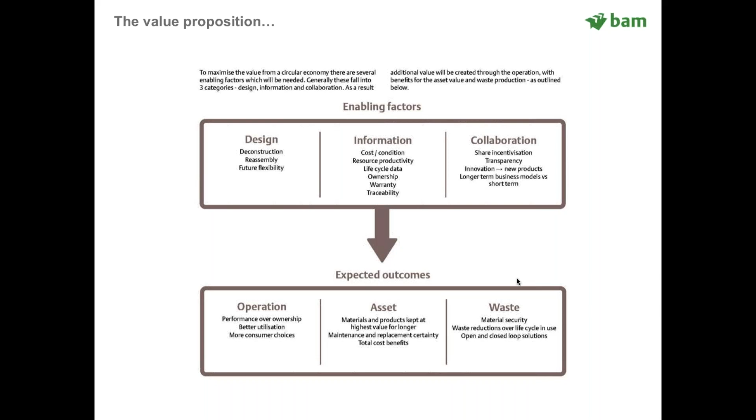So I'll give you a few examples. Obviously I'm going to stick to the 10 minutes, be very brief, but feel free to ask questions afterwards.

So the ABN AMRO Pavilion, Circl in Amsterdam, when it came to BAM as a tender, it was not a circular economy approach, and the architect had designed this wonderful concrete structure. It was almost the opposite of sustainable, but it was very stylized. It would have been a landmark building.

I think what we've done, through roundtable discussions with the client, the architects, the engineers, and also bringing on board the supply chain, is innovate around different solutions, looking at modular prefabrication and really designing for disassembly. But not just stopping at design for disassembly, thinking about reuse of materials through that process. Collectively, we managed to come up with a totally different solution, a different way of engaging with not just the internal and external stakeholders, but also the client.

ABN AMRO found that for them, going through this process with us of engaging with their own employees was valuable. One of the products in the building is made from jeans, used jeans from the staff, the employees, my colleagues as well, people working on the project, and that became acoustic insulation, which is visible to everyone.

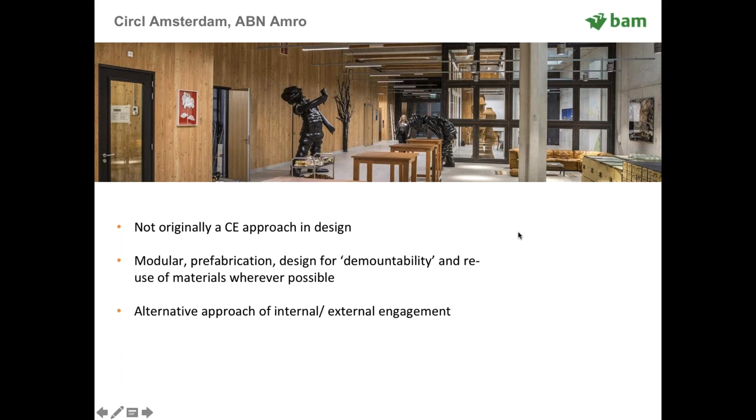So the next slide is basically looking at how we focused on life cycle thinking. For example, in a normal process when you're designing, you look at the inherent risks around building regulations, air tightness, water tightness, fireproofing, etc., performance. But what we did here was put together a matrix looking at all of this, but also circularity as a key emphasis.

And where the client really valued that input is where we could demonstrate that by going for material X instead of Y. So if we're going for timber instead of steel or concrete, for example, as the structure, we were able to increase the residual value of those assets.

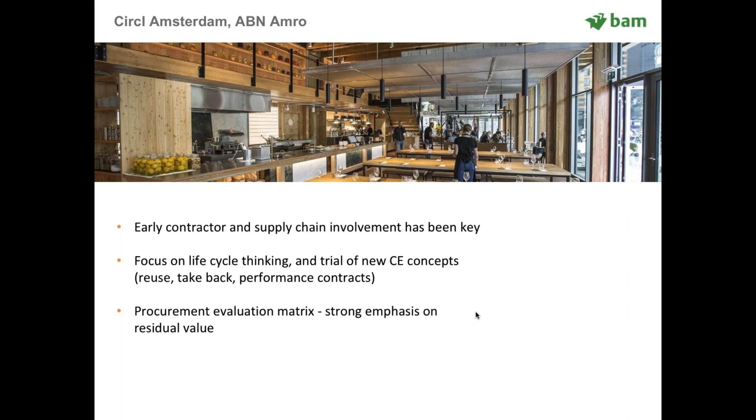So again, just moving to the next slide. This sort of highlights some of the case study in effect. What was the business model? So you can see that on average we've achieved residual values of greater than 50% compared with the initial budget cost, and that's after 25 years.

And also what we're very keen on exploiting is understanding what different members of the value chain needed to do within their role against the standard linear model. So what does a designer need to do to become more circular? We've been through that. Obviously you'll get the slide, so I won't go through everything in detail. So if we just move to the next slide.

Another project that we worked on, again finished last year, is the Royal HaskoningDHV office. And this was interesting because it wasn't a new build, it's a refurbishment project where they, as a tenant, wanted to occupy the space for 10 years.

And we, as the developer, the contractor, the designer, had to really think around, okay, how do we create a site that gives the occupant, the tenant, the space that they need, and it really got us thinking about where do we get the best quality materials that can be reused in the first instance, but also after 10 years, if the building gets demolished or they decide not to renew the lease, how can we ensure that the residual value of those materials will be over a certain percentage, and that would guarantee our income essentially.

So we really took the risk on residual value for this project, where in order to get the investor signed up to give us the cash to develop this project for a paying tenant, we had to seek investment. Now the problem being that from the time that we had a design which was signed off to getting the investment, there was probably 3 or 4 months gap.

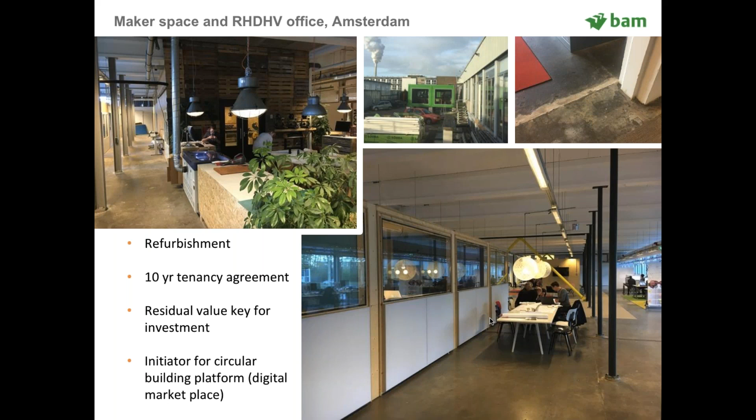And what would really help that is to initiate a circular building platform, and that is a digital marketplace. So that really worked in our favor, and that sort of then led to a product being developed, which is a circular building platform, which we're developing with IBM.

Another project which I just wanted to highlight is, again, an experiment we did in London. It was really to try and engage with our supply chain to understand the consequences of giving us materials that we can then reuse or that can be fit for purpose for reuse. This was an experiment, and it really challenged the suppliers to think, well, what do I do with those materials when they return back to the manufacturing plant? So again, that was an interesting proposition.

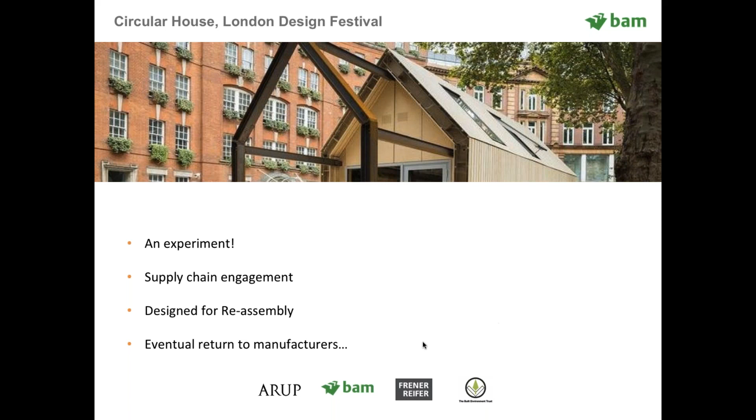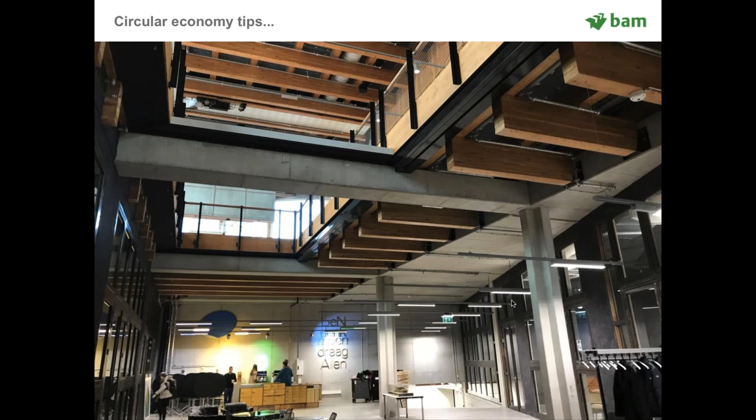If you just click again... sorry, you've gone the wrong way. So if you go to the end again, yes.

Promotion of lifecycle solutions has really helped us offer our clients the value proposition they need, to understand that the asset value of their building or infrastructure project will be worth more in a circular fashion than a linear fashion. But also to understand different design approaches.

It's been key that getting early subcontractor and supplier involvement really produces the value we're looking for, and it's a collective vision that we've been working together to propose circular solutions together. So that concludes my presentation.

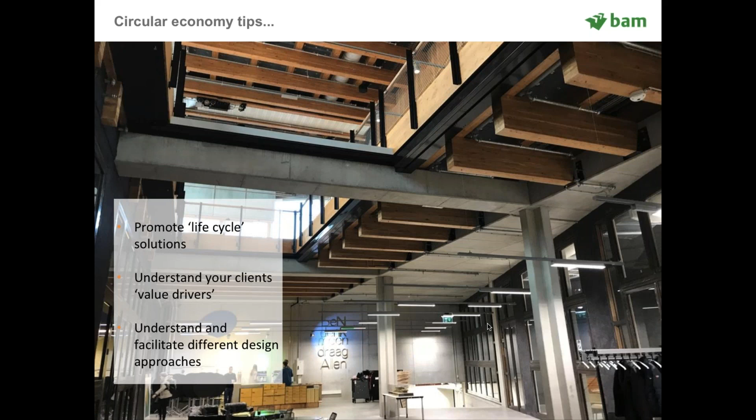I like very much in the presentation this focus on value creation, and it was also justifying that these business models can be profitable even in the construction sector, which is seen sometimes as a bit conservative.

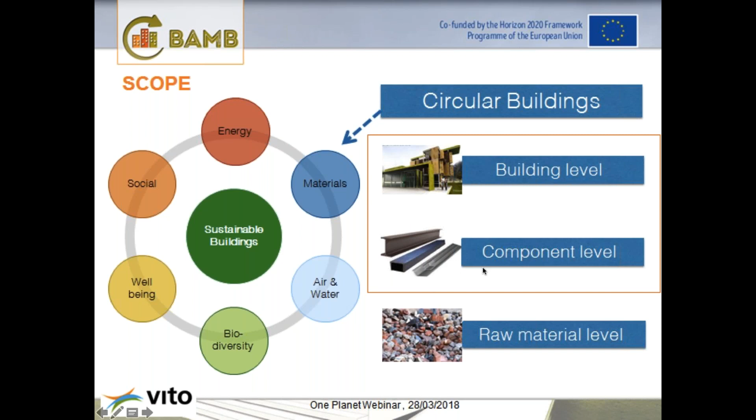Next slide, please. One of the challenges which is particularly relevant for the building sector is how to create short-term incentives. Buildings have very long life cycles. They also often change ownership several times throughout their life cycle. This means the people who pay to build the building are not often the same people who will handle it when it reaches end of life.

We all know that building circularity should start from the design phase. But how can we convince people to invest today in circularity for some residual value in the distant future, which will probably be received by someone else? And how can we convince people to invest today in circularity when there's no taxation benefits yet, like those available for building energy improvements? Next slide.

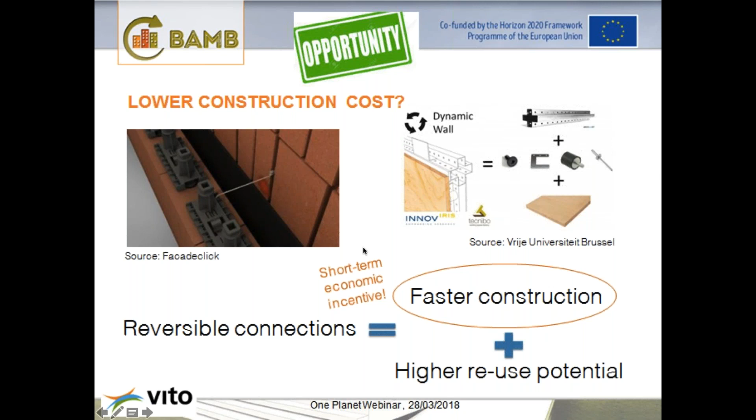There are actually still opportunities. To facilitate building circularity, reversible connections are very important. So instead of using traditional wet adhesive materials, such as mortar, these reversible connections often use dry mechanical components, like these bricks and interior walls. As a result, the construction can be a lot faster. They can be less weather dependent, and they can be less skill dependent. Especially in countries where labor costs are a lot higher than material costs, these reversible connections can provide short-term economic incentives while also providing longer-term circularity potentials.

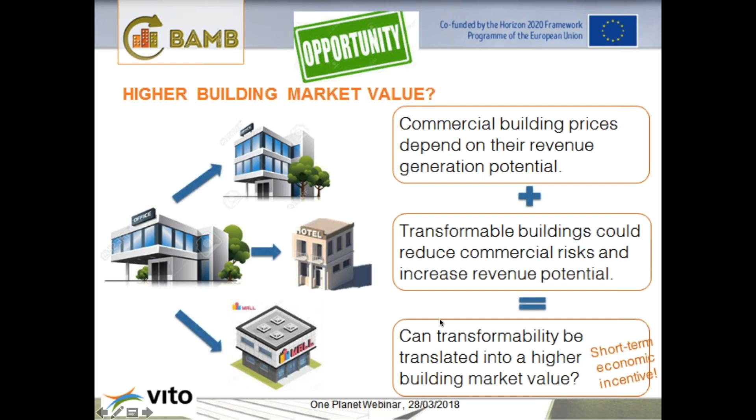The key question is, can this be translated into building market price today? And if yes, then we have created a powerful short-term economic incentive.

A second challenge, which I will discuss today, concerns circularity at the component level. The reuse value chain of building components is often informal and underdeveloped, like Nitesh has just pointed out. It is actually a generic challenge which applies to many sectors. There are many barriers to reuse.

There are technical barriers. People don't buy used smartphones because the technologies are outdated. There are also cultural barriers, like, well, I don't want other people's junk in my house. There are legislative barriers, but probably the most surprising barrier is cost.

After all, except for antiques, shouldn't used stuff be a lot cheaper than new stuff? Otherwise, why would anybody buy them? But as we will see on the next slide, this is unfortunately not always the case today.

Let's take structural steel elements as an example. Technically speaking, steel does not degrade. Decades later, steel beams can still keep the same performance as when they were new. But today, most used steel beams become scrap metal instead of being reused.

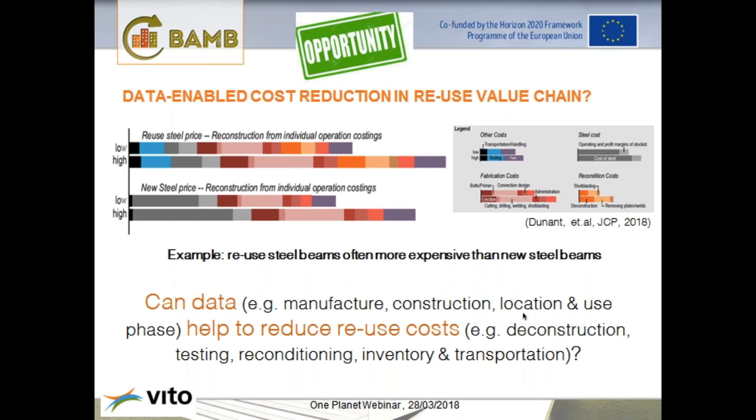Let me wrap up. If we want to scale up circular building to a level which will really make a positive difference environmentally, it needs to become an economically logical choice. It is a business challenge, but the answer is not provided by business alone. We need the creativity of architects, engineers, product designers, and technicians for more cost-effective technical solutions. We need the power of large players, such as Royal BAM, to pull the supply chain and reach economy of scale. We need policy instruments which can effectively stimulate good practices.

We also need an eye for business opportunities under today's boundary conditions. We need the technology, policy, and business innovation engines to work together so that one day, when talking about circular buildings, instead of asking why, people will say, why not? Okay, thank you for your attention.

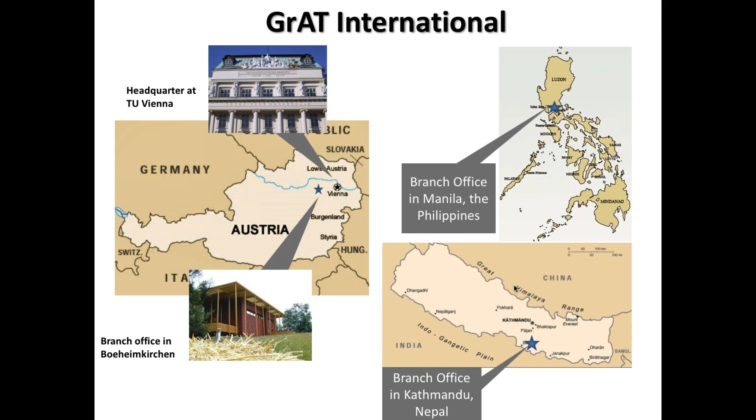So we are not only based in Austria, where our headquarters is, but we do have international offices. One is right in Manila, where we do the Zero Carbon Resorts project, tackling Philippines and also Thailand. And we do have another office in Kathmandu, Nepal, where we basically serve the South Asian countries. The Zero Carbon Resorts project itself is a 4-year initiative, which will actually end this year, and it's supported by the European Union with the Switch Asia program and the Austrian Development Cooperation.

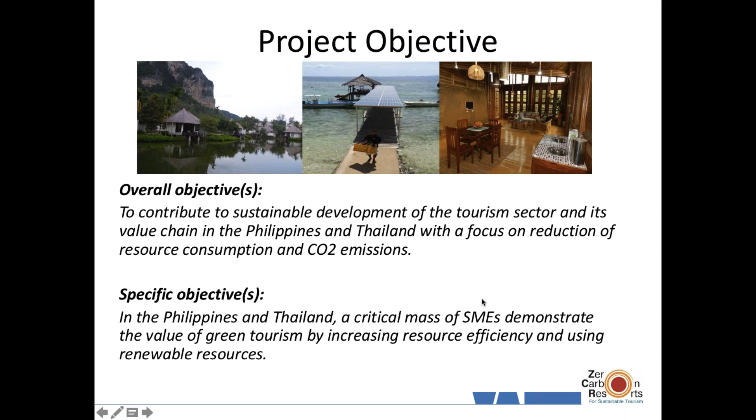Our project objective is to contribute to sustainable development of the tourism sector at large, with the aim to create a critical mass of SME companies demonstrating the value of green tourism by increasing resource efficiency and using renewable resources, at the same time increasing profit and creating value for the communities, and serve as a driver.

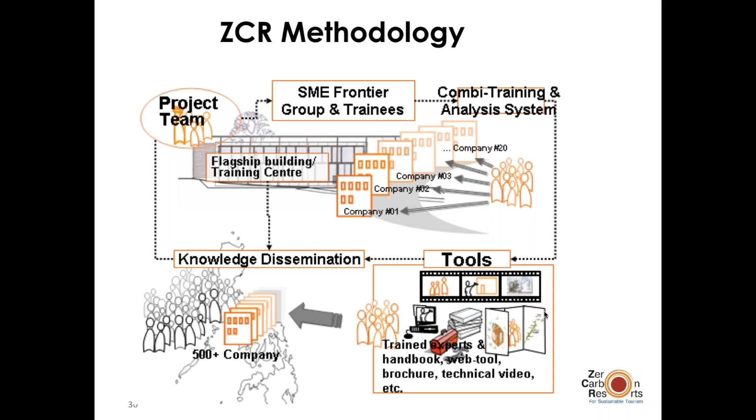The methodology looks a bit complex, and yes, it is. We've started off with a very small group of frontier companies, maybe like 20 companies. We've combined that with a training system. We trained about 200 local engineers and architects in order to help spread the news and spread the concept via tailored tools like handbooks, brochures, and website materials that all serve as outreach material.

The 3R methodology raised in the title is really meant to be a triple bottom line approach. The 'reduce' is harvesting the low-hanging fruits with very limited investment costs, and I'll show you a few examples right now.

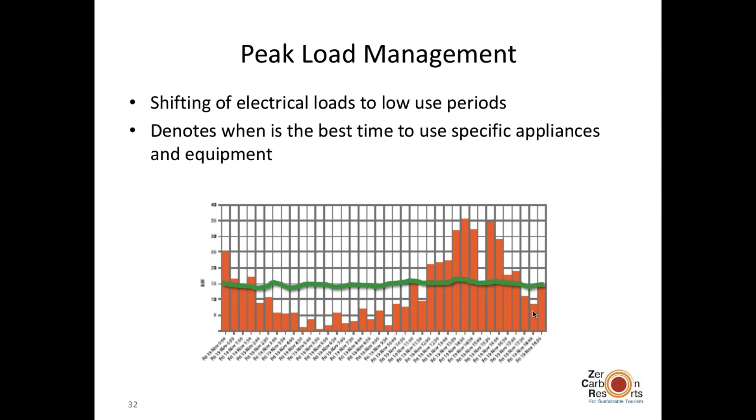For instance, we talk about behavior change. That's nothing where you need to take money to your hand. Shifting electrical loads to low-cost usage periods will already generate savings, and those savings can be used later on, just like with the next few examples.

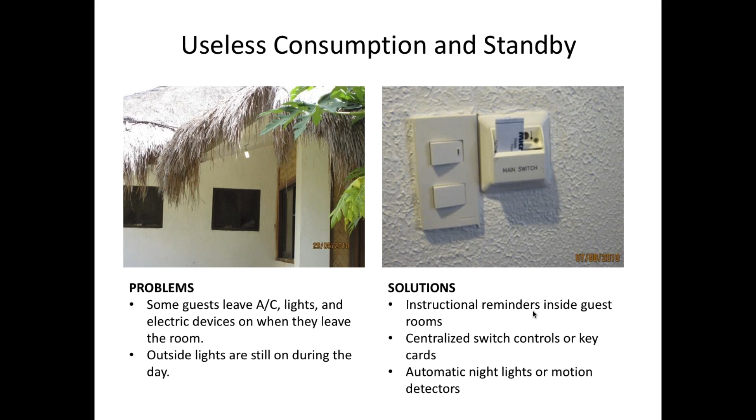Again, behavior change. Useless consumption and standby is rampant and very abundant. Lights are on during the day. Standby is on in all rooms. This is all energy cost that has no benefit, but it comes with a price tag.

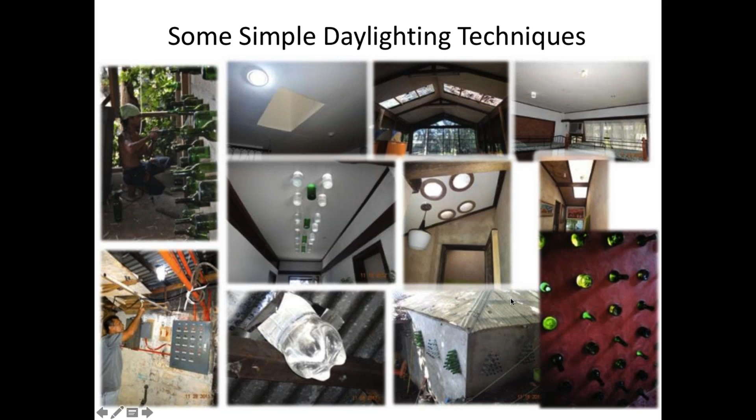Another example: daylight can be used in so many cases, and it's basically free of cost. We have developed a number of nice-looking but very cheap solutions, and our participating companies have been very creative in supporting that initiative. You can definitely see a number of nice examples here.

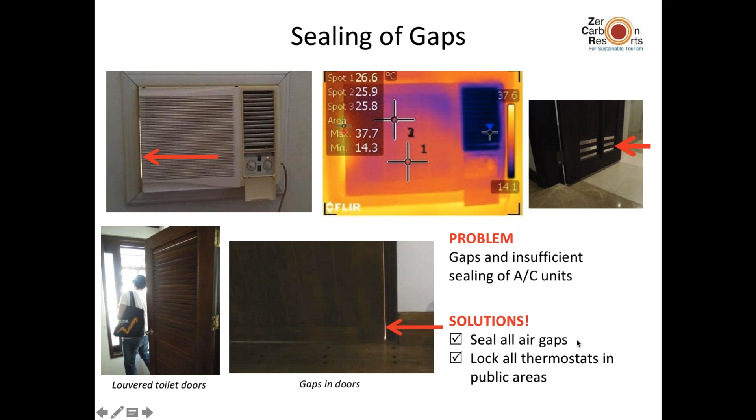Another issue is air conditioning. It is very often just very inefficient, and even without changing the equipment, you can drastically reduce the energy consumption by sealing the gaps, closing the doors, and not cooling the ambient rooms. That all boils down to a significant number of savings, which, at the end of the day, is money not spent on operational costs, just like changing the color of the roof.

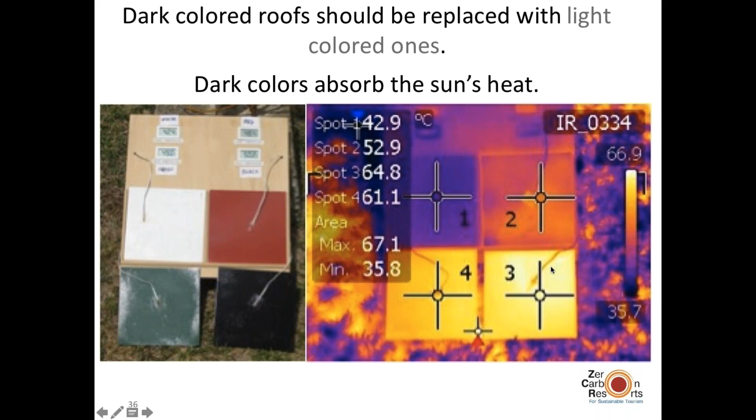So now all those savings that were generated in this reduce phase, we ask the companies to reinvest. So don't put it aside, don't regard it a profit, but reinvest that by switching to renewable energy, by switching to more energy efficient appliances. And we help them also choose the most efficient ones. And by doing so, they can actually generate more savings, which eventually will lead us to our ultimate goal.

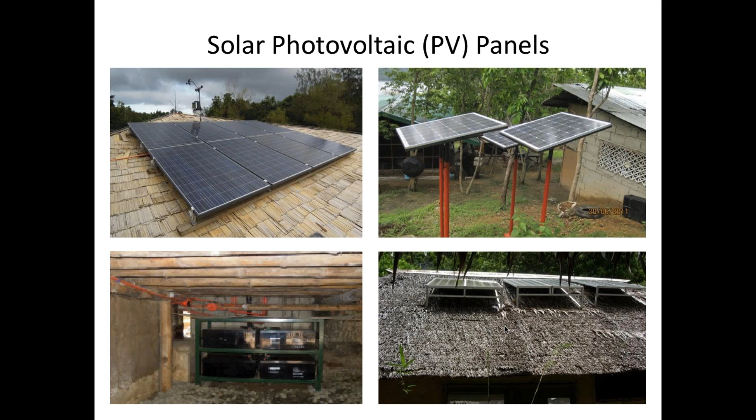So for instance, photovoltaic prices came down, so they became a lot more affordable. And in an island situation where you're not competing with a general electricity grid, but with a diesel generator in the backyard, the break even is even closer, and the suppliers are picking up because it was rather undeveloped area to supply renewable energy devices such as PV, but nowadays it's definitely picking up, and they are supplied in good quality as well.

So PV panels, solar tubes, again, daylighting techniques on a more commercial level, that is a dual benefit. Not only you get a high quality indoor light for offices and kitchens, but you also reduce the heat gain from the lighting fixtures, and in return less energy for air conditioning.

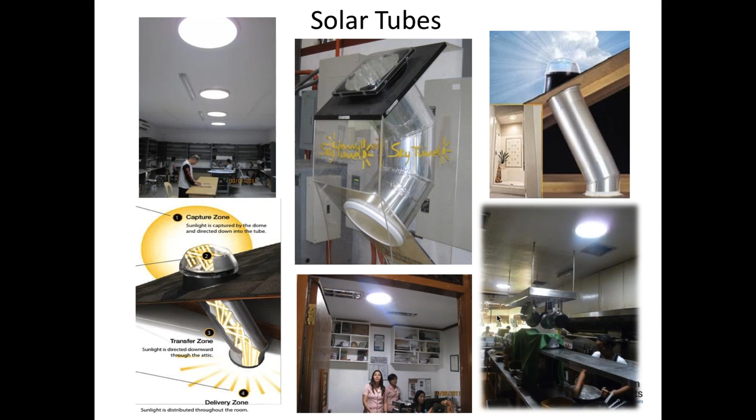Air conditioning and other energy appliances, we definitely help them to switch to inverters, to high energy efficient appliances, from fridges to TVs to air conditioners, washing machines, and all other appliances that are commonly used in hotels and resorts.

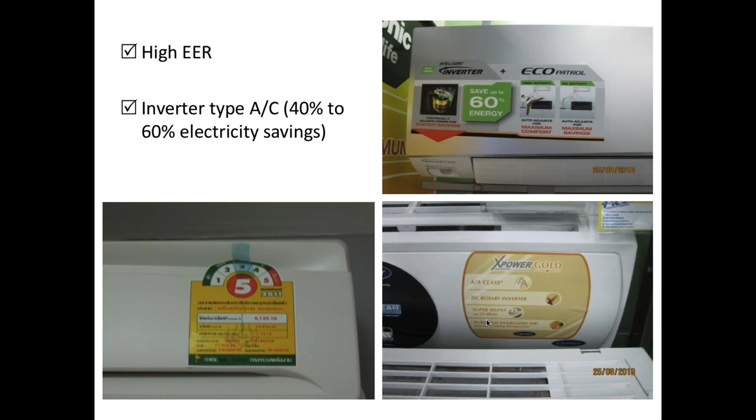Next slide, please. Another very hot topic in the literal sense is heat recovery from air conditioning, because that is a far underdeveloped concept. Using the waste heat from the air conditioning to produce hot water, that is a big deal of energy savings and cost savings as well.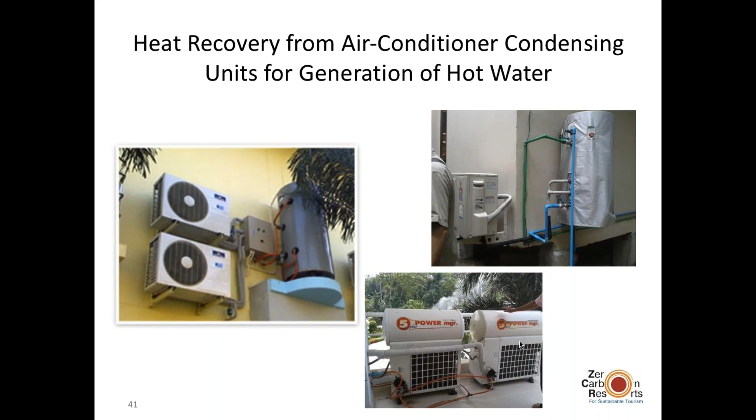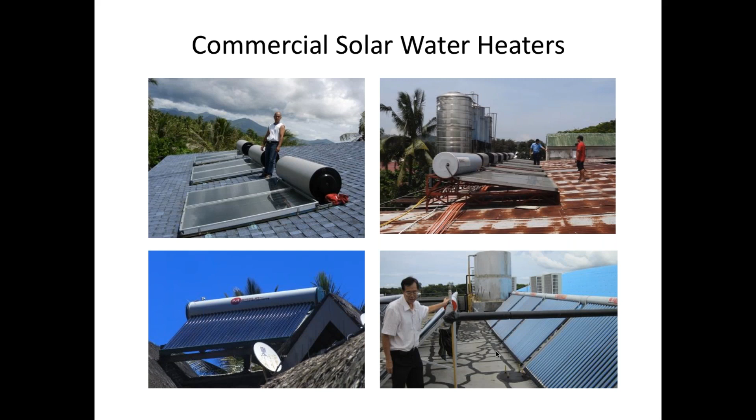But the suppliers are still a bit reluctant to produce or supply that in small scale. Same as with commercial solar hot water heaters, we had a little problem in availing good quality products, and the situation is getting better, but we were also looking at the other end of the scale, because with the abundance of solar radiation, such as in tropical Philippines, you can easily do a do-it-yourself solar water heater, and that was targeting the rather poor communities or small beach cottages with very limited investment possibilities.

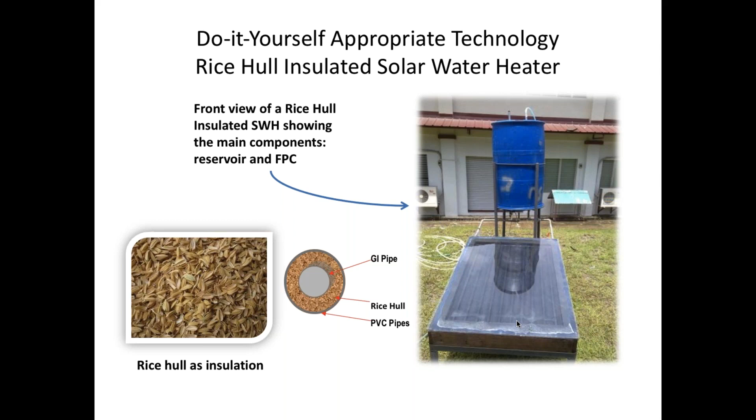And we have designed and built prototypes with published open source do-it-yourself appropriate technology measures, which are free of charge, and they are actually being used by the resorts, and as you can see here in some of our member hotels, they're further developed, they do little changes, and that is sort of a growing community.

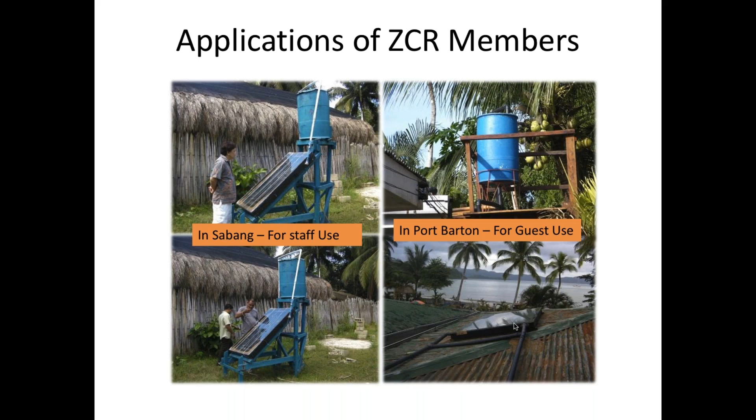Of educational value as well, because once you do engage in do-it-yourself technologies, you truly understand the nature and the concepts behind, and you do not mistake it with PV or with other appliances that are probably a bit more expensive, but you really understand what the whole concept is all about, and you can teach your neighbors, and that's what's actually also happening.

So the redesign is actually bridging those two topics that we're talking about today, the tourism and the construction. We were aiming to design and build a showcase building that can integrate all the technical features and serve as a construction model for the future, which is island fit. And with island fit, I mean—change slide, please.

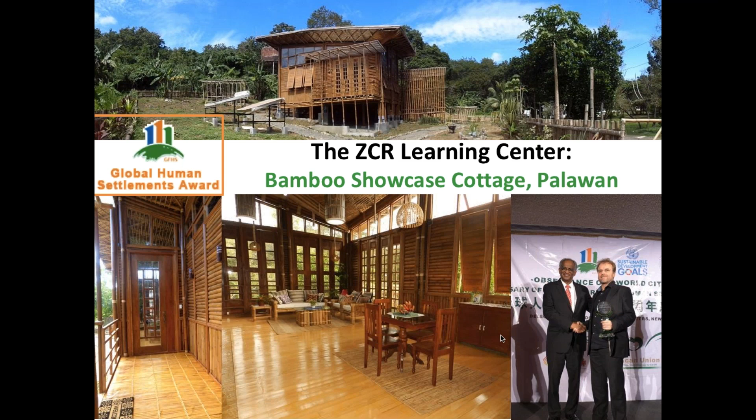So we call it the Zero Carbon Resort Learning Center, and we are a little bit proud that we actually won the Global Human Settlements Award in 2015 with that construction at UN headquarters in New York. It's totally made from bamboo and local materials. It is using indigenous skills and knowledge, and it has incorporated all those technical innovations that were built along the project lifetime.

So you can see a couple of initiatives or innovations on.

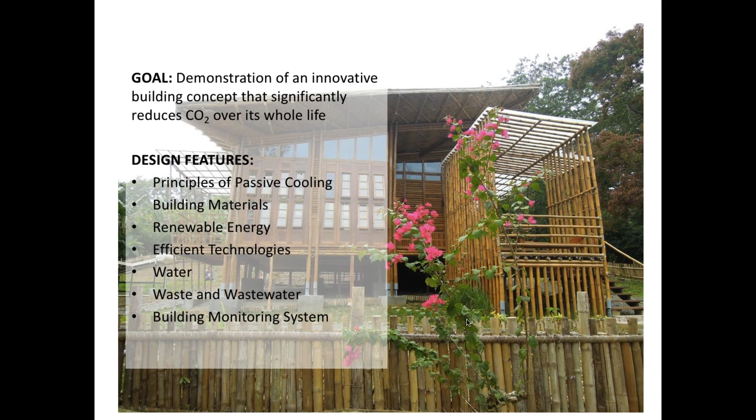Passive cooling is of course the key. We do not use any air conditioning system. We do have an extensive analysis of the indoor climate and comfort parameters, and it's pretty well measured. So we achieve comfortable indoor climate with natural building materials, renewable energy, and efficient technologies. Even the water is purely rainwater. We do not have any wastewater. Everything is treated on site, and in the sense of circular economy, is used for generating food, growing tomatoes, so even the nutrients are recycled. And the building monitoring system, which is up and running until today, is actually proving the data and comparing it with the weather situation that we have on site.

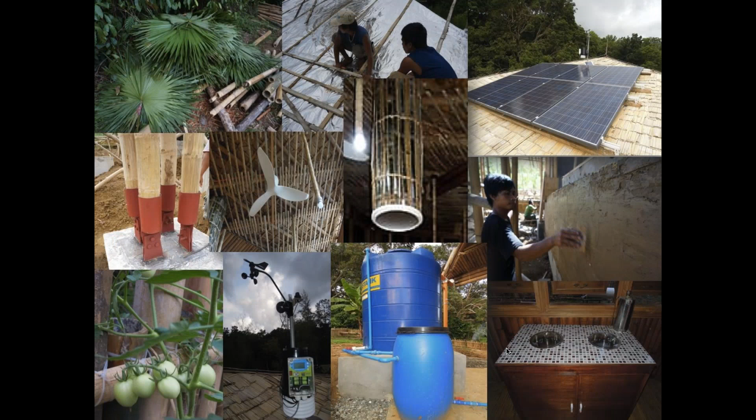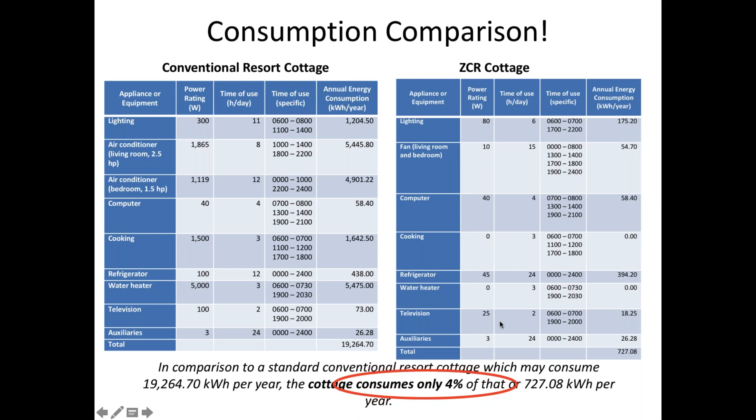So in a nutshell, we did a comparison with a standard cottage of the same size, and what you see here circled in red is that we actually consume only about 4% of electricity compared to a conventional building of the same size in the tourism industry. And that comes with 24/7 availability, which is not guaranteed in that area because Palawan in the Philippines, where the building is situated, is experiencing frequent brownouts, blackouts almost every day. So you cannot have a 24-hour electricity guarantee. With the standalone PV system, it is very well possible.

And since the panels are so small, it is again even affordable. And that is quite well acknowledged by all our member hotels. At the moment we do have 860 plus hotels, resorts, and other tourism establishments registered in the Philippines. We have another 300 in Thailand, and it's a growing community. Not all of them are implementing everything to the last possible measure, but they are learning from each other. And since the step-in threshold is very low, the buy-in is easy, and they are led gradually to implement more sophisticated measures, with the final goal being the zero carbon resort.

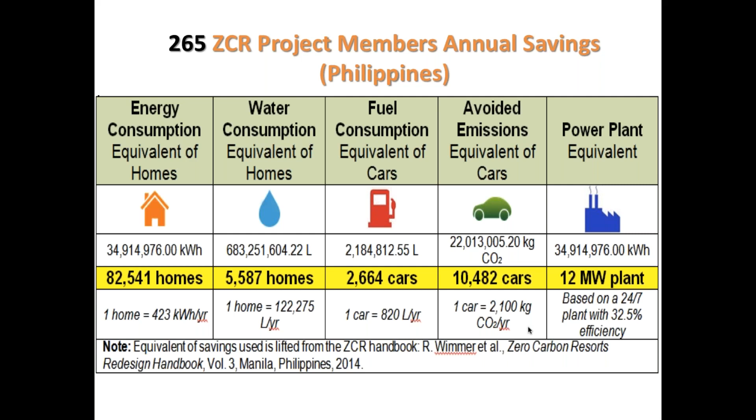So in terms of monetary value, because I often get this feedback, well, going green is not affordable, it must be costly - it is exactly the other way around. Those 265 companies save an equivalent of 7.2 million euro every year. So now if you imagine an upscale, and that's what we are actually aiming at, an upscale to the entire industry, the economic savings as well as the carbon emission reductions will be enormous.

In order to standardize the whole thing, we have closely collaborated with the Department of Tourism in the Philippines, and we have created a certification called the ANAHAW. The logo indicates the ANAHAW, the local term for round leaf palm, which is used also in our demonstration building. It's the unofficial national leaf. It's a very unique plant that had undergone very creative uses, from bags to roofs to all sorts of other handicrafts.

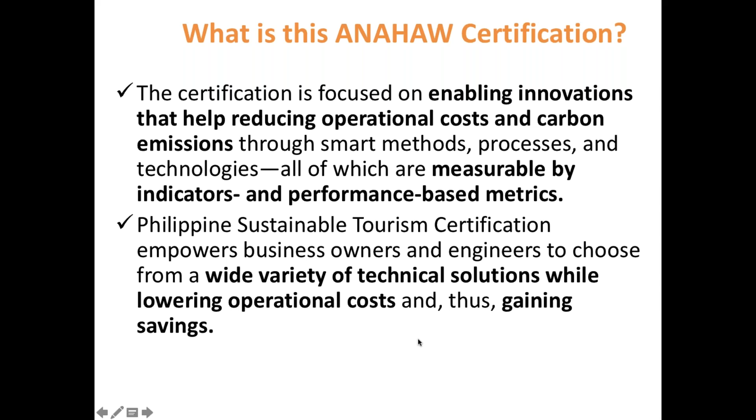The ANAHAW certification has been launched two months ago and is currently under rollout, so with that we are expecting a lot more followers and a little bit more standardized approach. It has been developed bottom up - that makes it different from other green labels, by really looking at which measures actually work in the country, which are accepted, and how can we bring them all together in order to create a standard that goes from one step to the other.

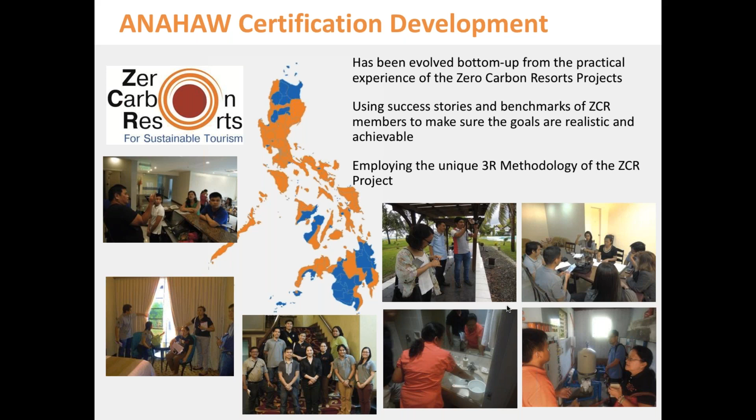We have five levels of this certification, which you can see on the next slide. All of them are roughly associated with the potential savings in economic terms. We are a bit strict, so it's not easy to get the first level. But if you do follow the suggestions, and we have consultants on the ground that can help the establishments.

They can actually expect economic savings from operational expenses of something between 50 and 60%. Next slide, please. Another unique feature is we do not just rely on a checklist, but very similar to the construction sector in Europe, we compute indicators. In this case, we do not compute indicators per square meter, but per guest night. The two indicators we're starting off with, because they're most important, are kilowatt hour per guest night for electricity or energy consumption, and cubic meter per guest night for water consumption.

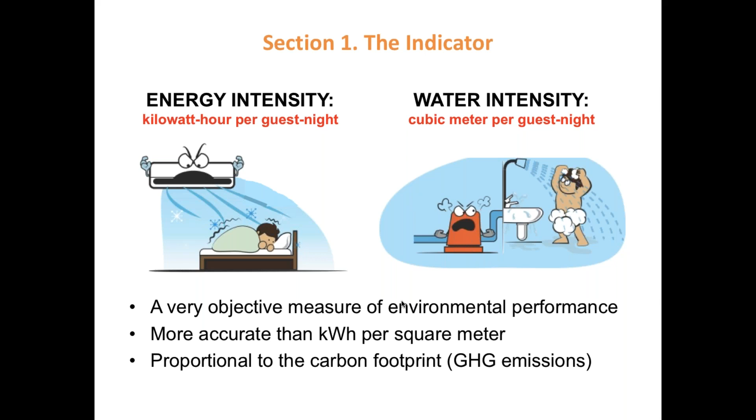So if you don't meet those criteria, you cannot avail the certification, even though you have a number of other nice features to offer. So with that very short summary, I'm looking forward to getting a few questions and have a few more minutes to explain.

Thank you very much, Dr. Wimmer. I think it was also an excellent example of synergies between the One Planet Network programs, how building technologies can be used for the benefit of zero carbon resorts. And it was also very good to show practical examples of how you can save 96% of the emissions by looking at these aspects, while also providing comfortable indoor climate.